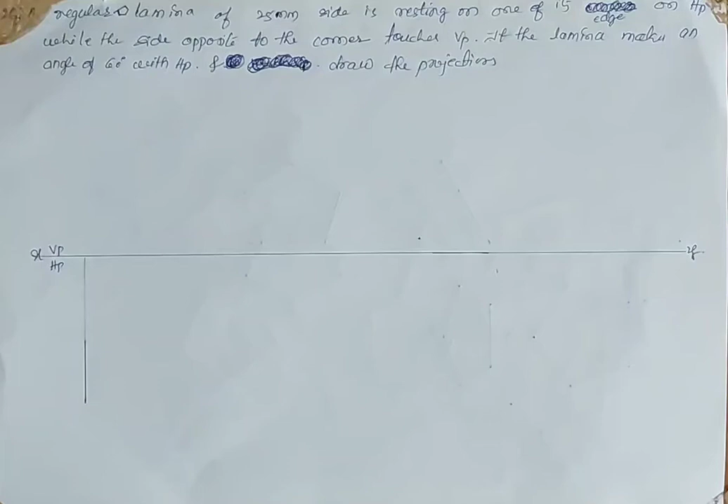Problem number 28. It is a regular pentagonal lamina of 25 mm side which is resting on one of its edges on HP, while the side opposite to the corner on which it touches VP. So this is the third question again. The pentagonal lamina is touching VP with a corner opposite to this side. It is the third position.

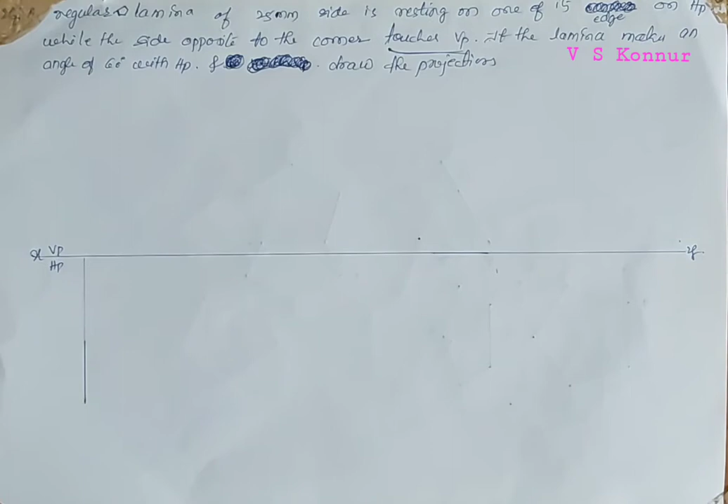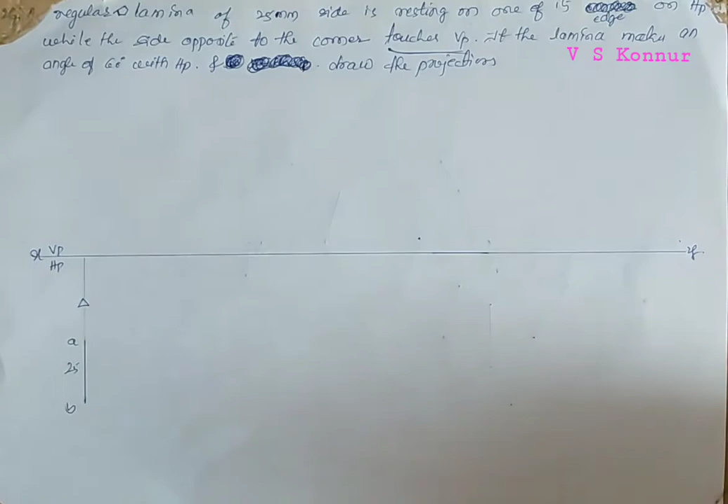The lamina makes an angle of 60 degrees with HP. So it is resting on HP, the HP angle is given, and we draw the projection. Now take 25 mm, so that gives points A and B. Now we'll take angles from these 2 points. We have to take the angles,

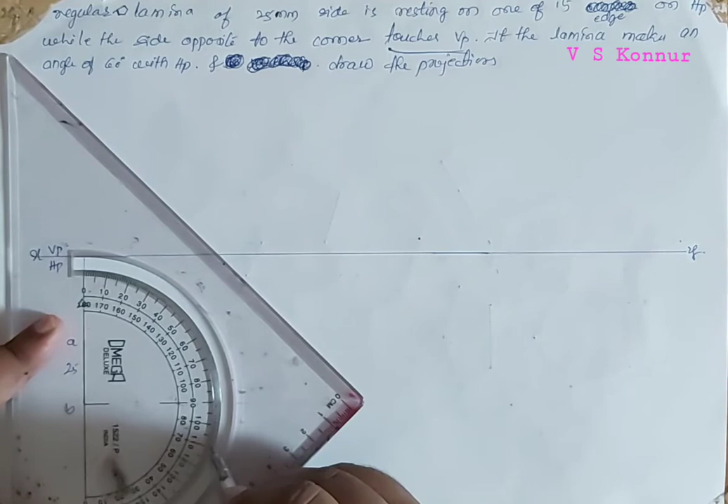that is 108 on either side, so 0, 90, 100, 110, so 108 we have to take. From this side we have to take 108. So don't make any error when you are taking it. 108 we got. Now we'll join these points with thin lines, not completely. As much as required, that much we will extend it.

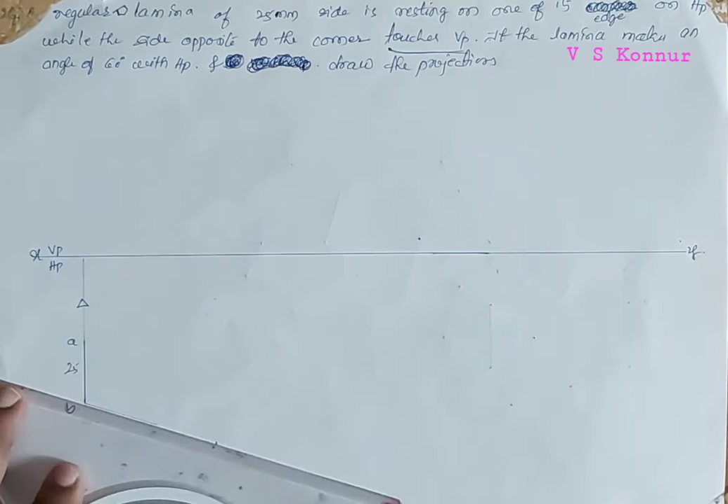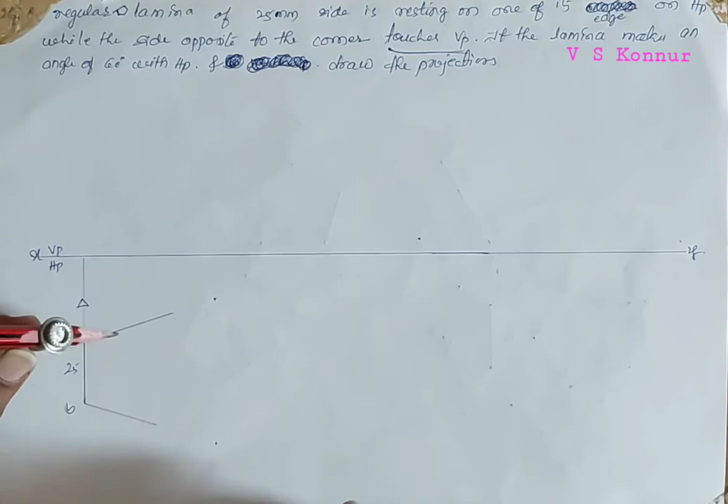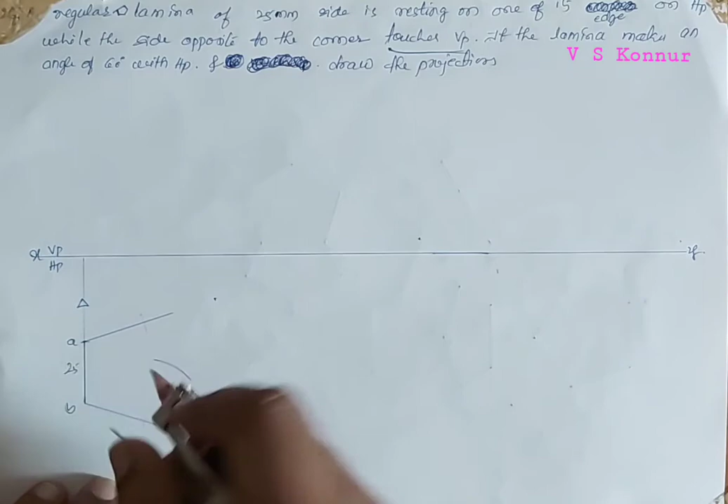Then we'll cut it by 25 mm distance. On either side we will cut. Next, from this point with the same length we'll cut this side, and from this side also. So we got 5 points of the pentagon: C, D, E. All the 5 points we got. Now we will make it dark and join the other points.

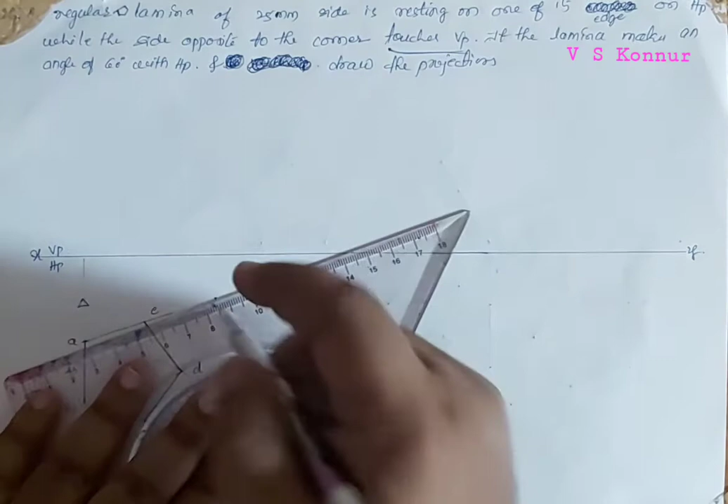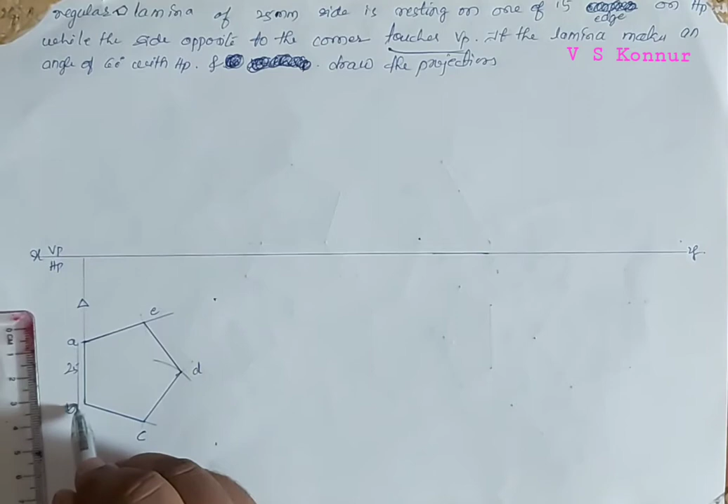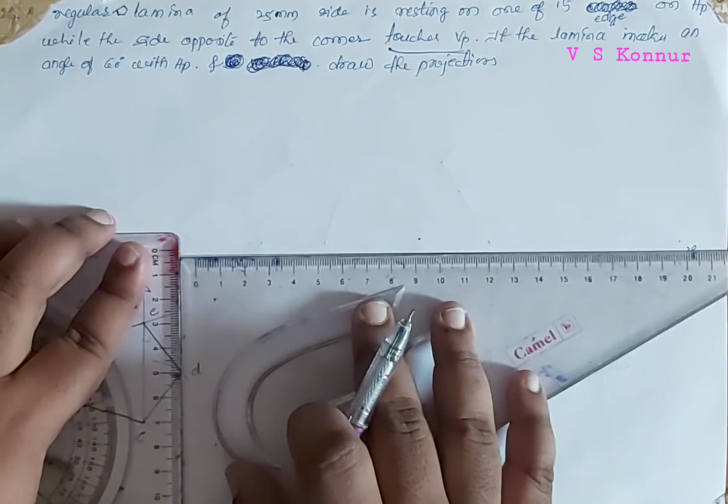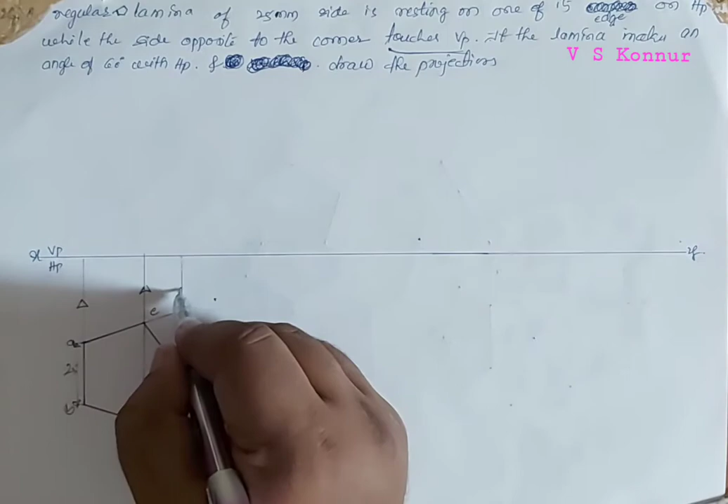Now one side is 25 mm, it is given in the problem. So 25 mm, resting on one of its edges. So first position. Now C and E pass at one point only, because of that we'll draw one more projector line here, and E should be drawn parallel to the XY line. Thin line, and then that point will give the lamina.

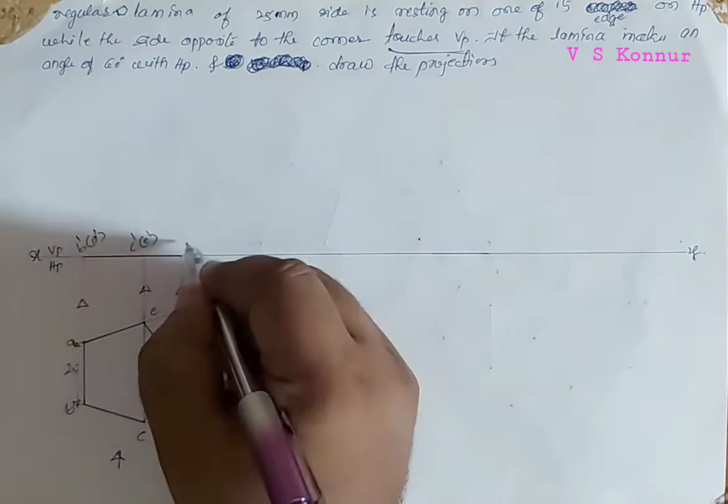When you are viewing from this side, B is visible, so we'll write it outside the bracket, and A is not visible, inside the bracket. Next, from this side C is visible, E is not visible, inside the bracket, and this is D dash. So resting on one of its edges with 25 mm side. First part is over. Next, the second part: it is resting on HP. Because it is resting on HP, you have to consider the HP angle first, and draw in VP. The HP angle is given as 60 degrees.

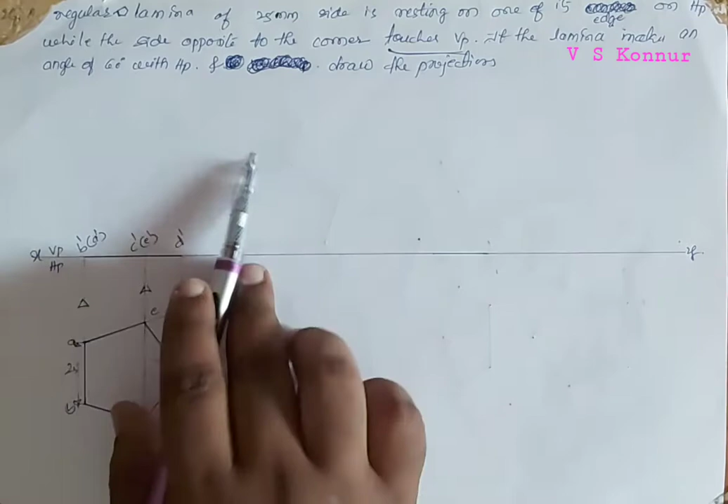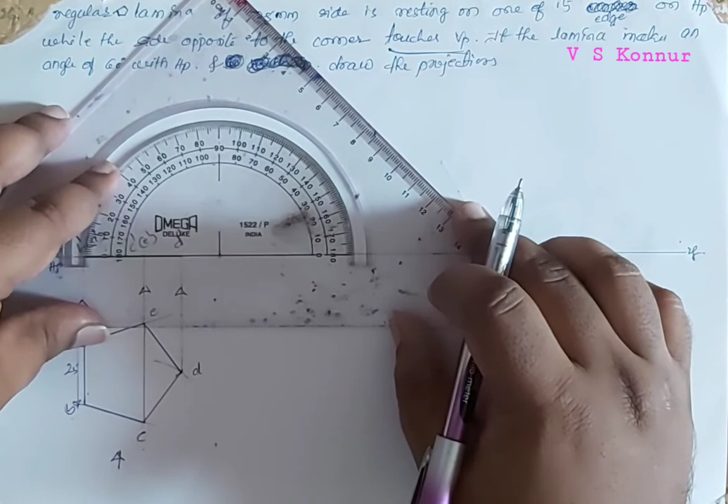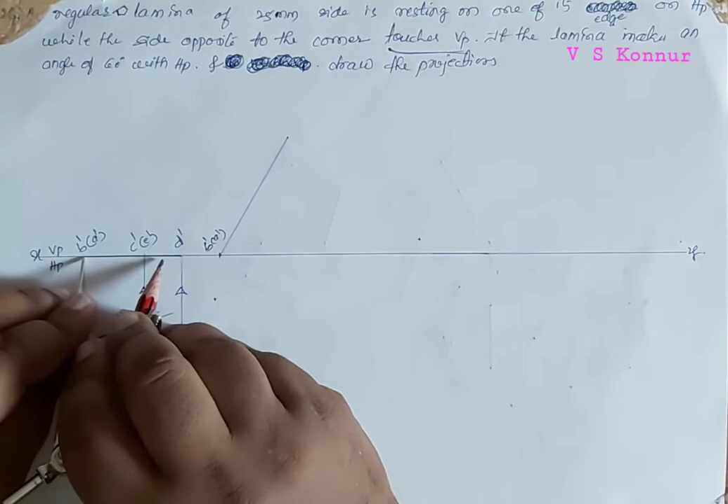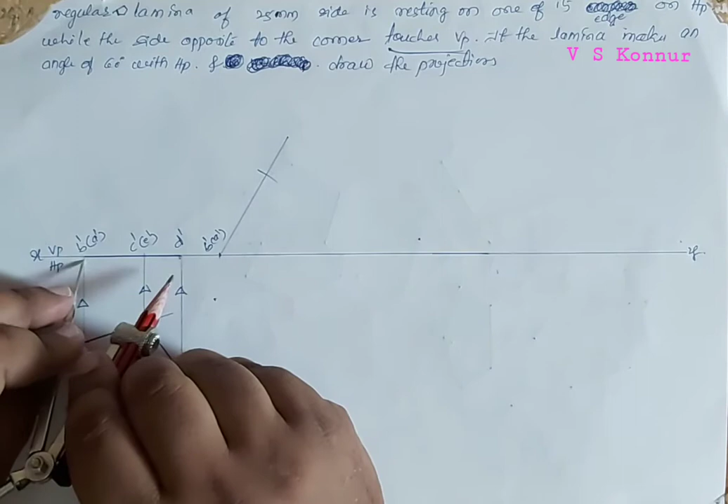Now we'll take 60 degrees by marking one point here. We'll take 60 degrees from this point. Now we'll join these 2 points with thin lines, and then this point is called B dash and A dash. And then we'll cut the distances. We'll cut the distance by keeping at B dash to get C dash, and then we'll take the distance of C dash point by keeping at B dash point.

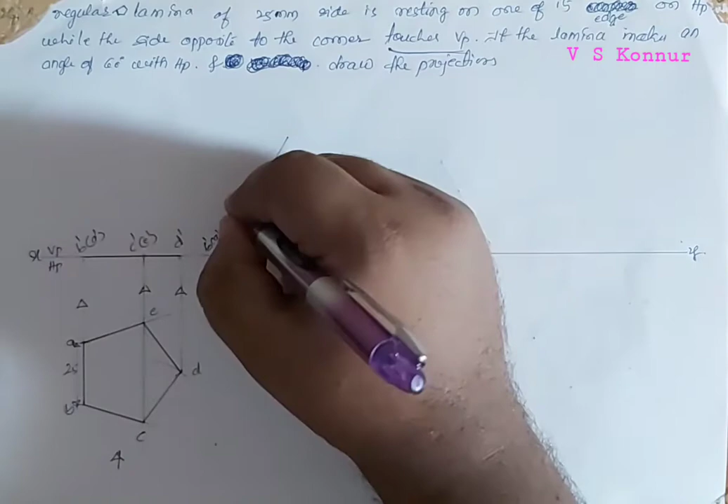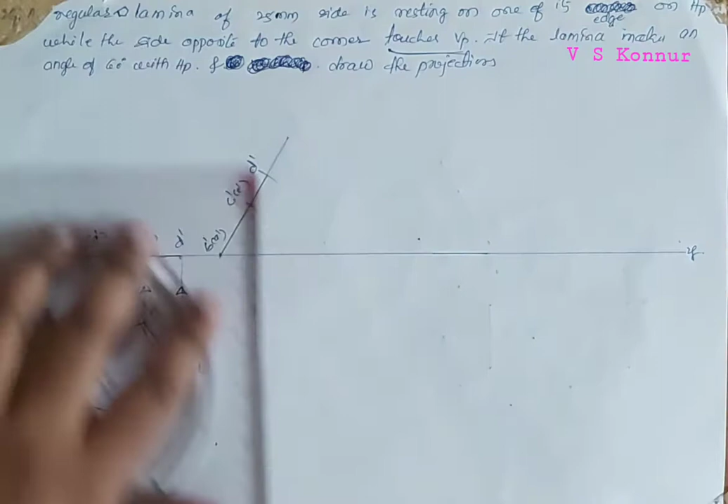One more cut I will make. So that point is called C dash E dash, and this point is D dash. Now mark only the lamina part, from this point to this point. Only that you have to make dark. Now draw the projectors from either side to get the top view of the second position. So we'll take this as reference.

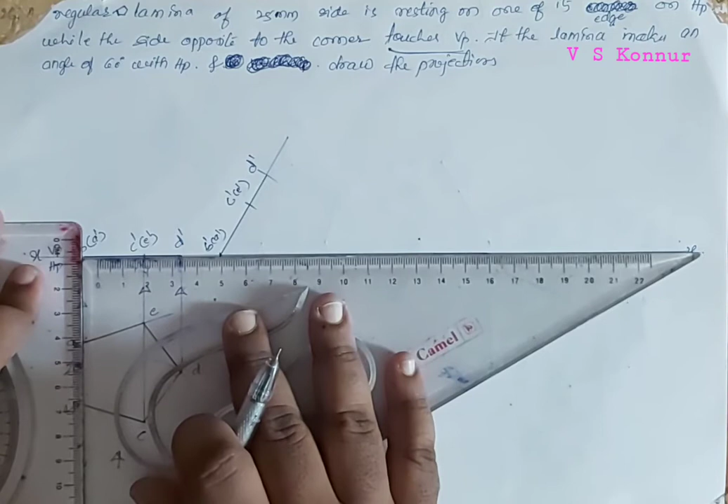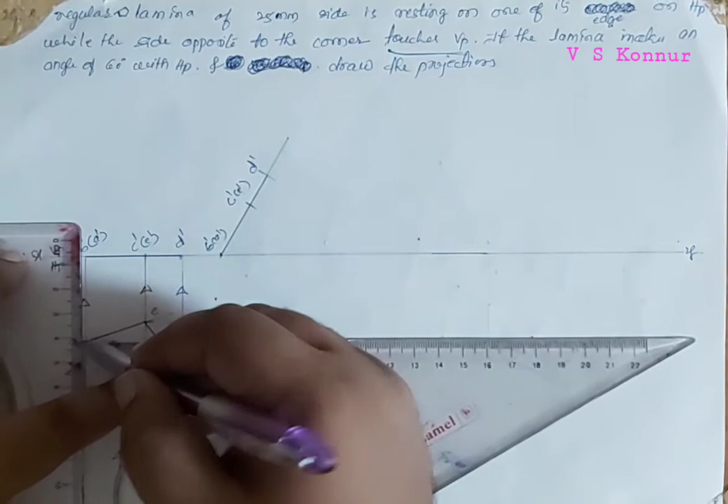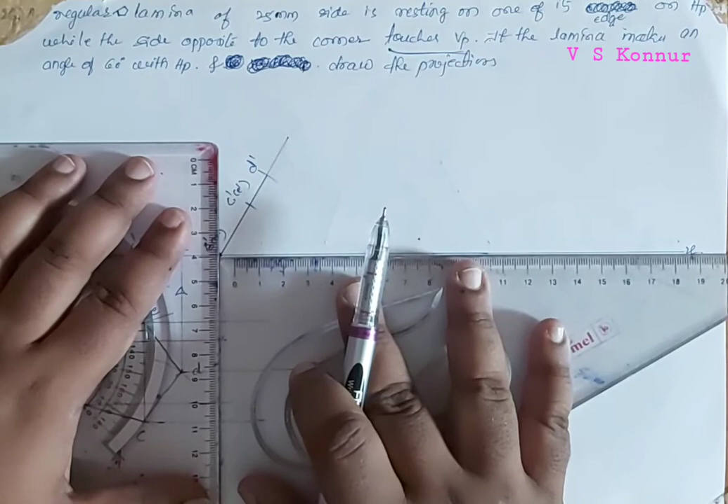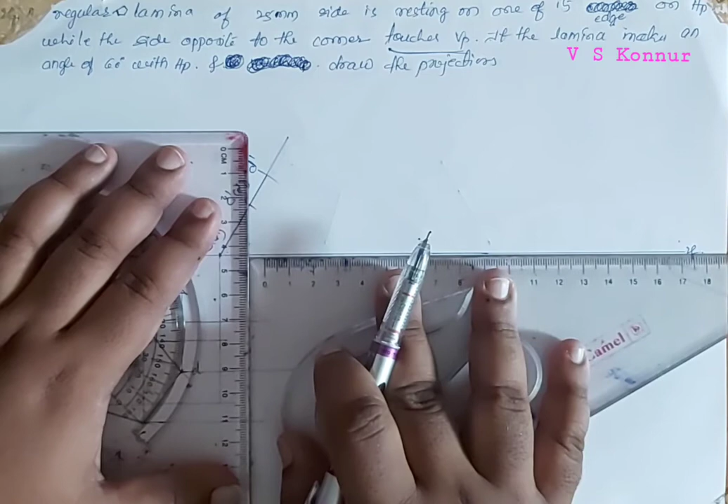Now from E point, till E point intersects, then from A point, D point, then from B point and also from C point. Then we'll go for B and A. Then we'll move on to C point. Then from D point.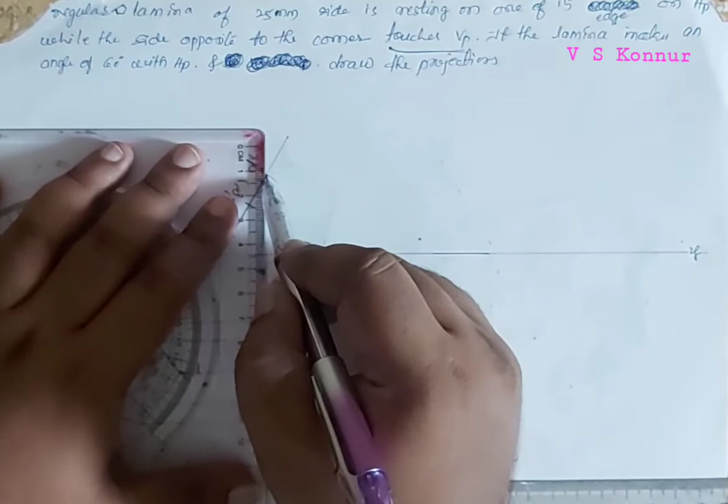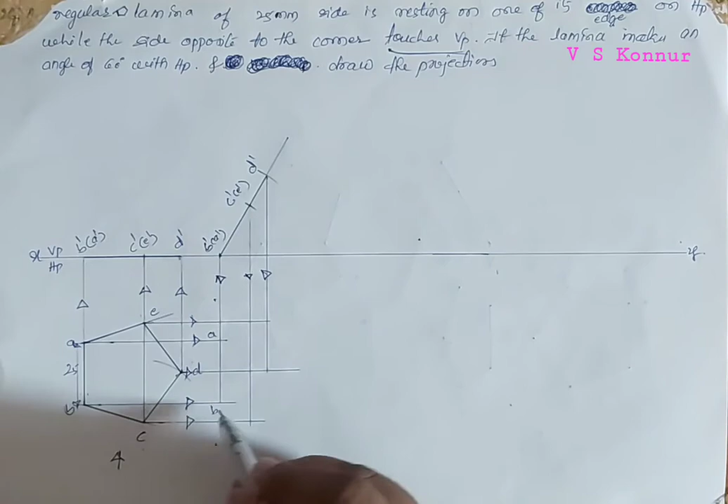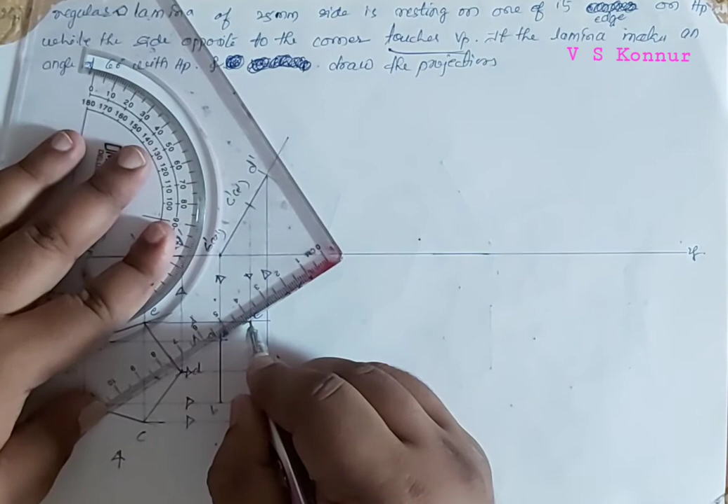Now give the arrow mark for all the projectors. Projector lines should be thin, only the lamina pentagon should be dark. Now we'll join all the points. So A to A it is A, B to B it is B, C to C, C is coming from here, C is this. So D to D, then E to E. Now we'll join all the points. Then A to E, then D to E, C to B,

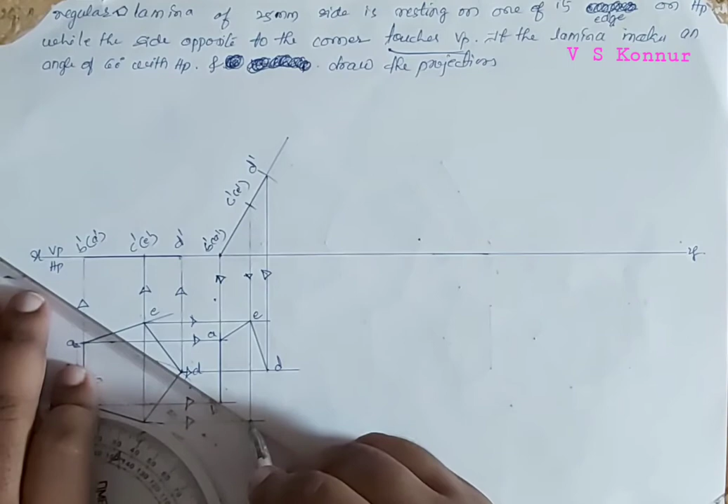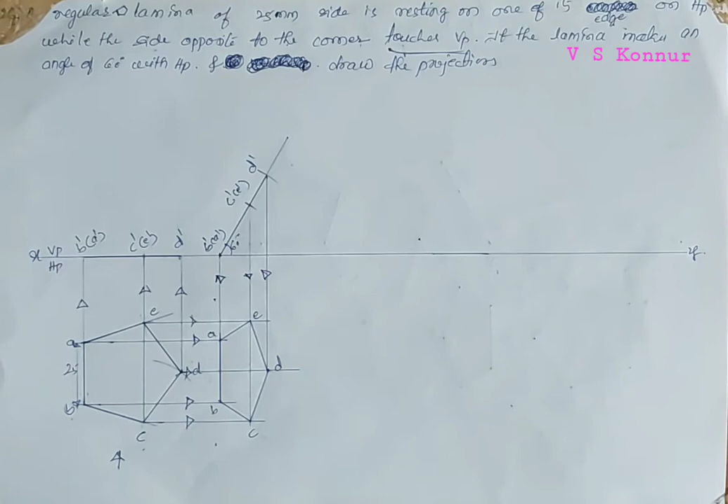then C to D. Now we got the second position top view, when it is inclined at an angle of 60 degrees. Now what have they given? The side opposite to the corner. This is the side which is opposite to the corner. This D point is the corner that touches VP. So the corner opposite to the side touches VP.

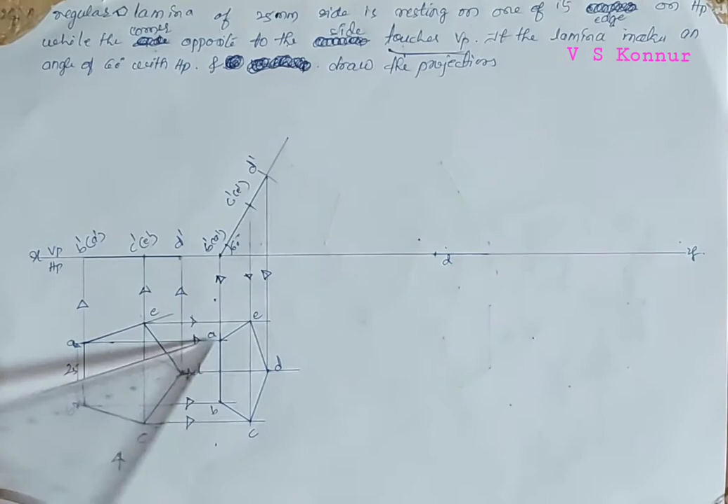Now this corner will be touching VP, as explained in the problem. So the corner D point I'll keep at this point. Now we'll take the perpendicular distance. We'll draw a 90 degree line from this point. So don't make any error when you are drawing 90 degrees from that point. So we'll take 90 degrees here and we'll draw.

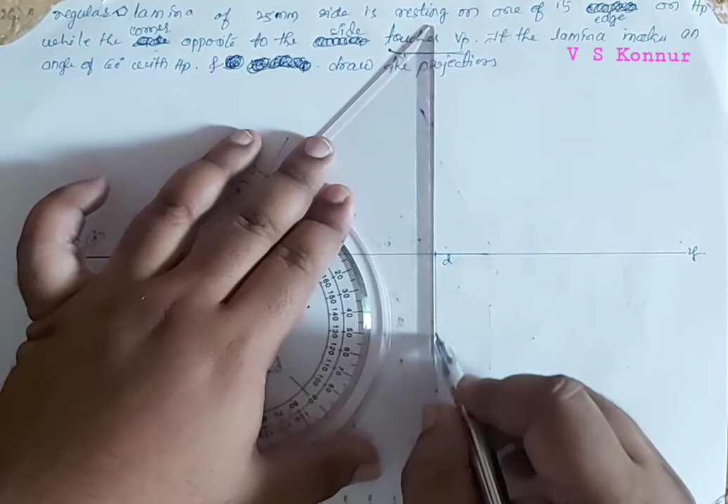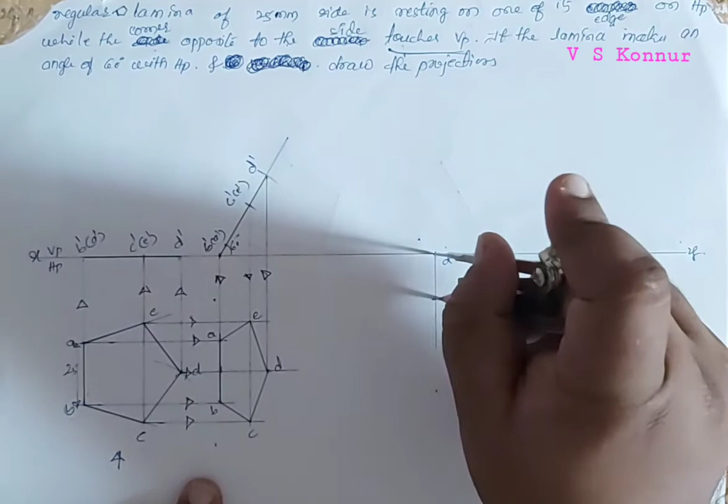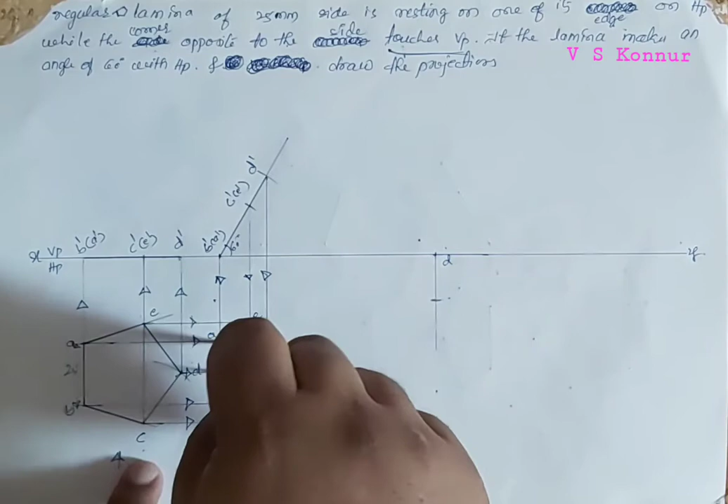Now we have D point and we'll cut it by this distance. From D point I have to cut this distance, the opposite edge distance. So this distance I will take and cut from D. Now take the distance from this point to A. On either side it is the same, so we will draw an arc from this point to A and from this point to B,

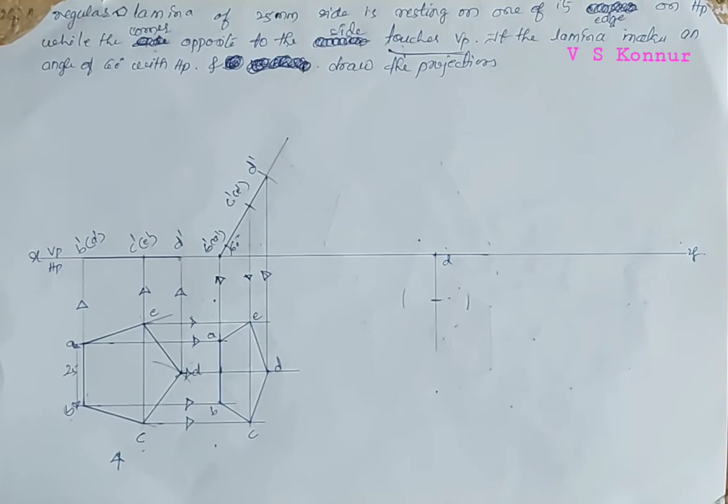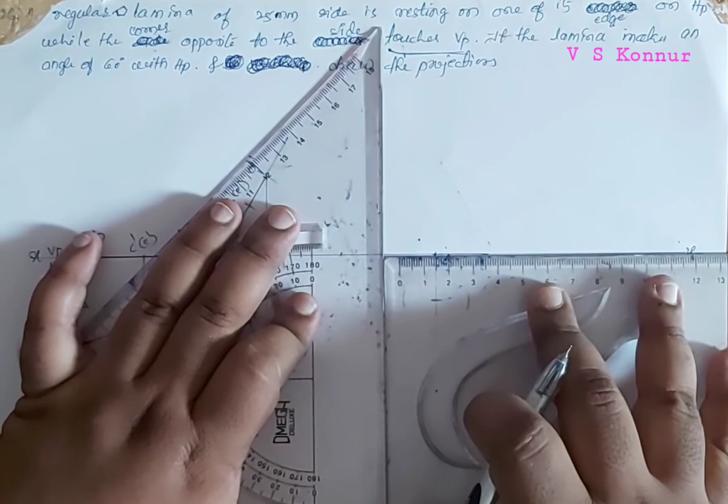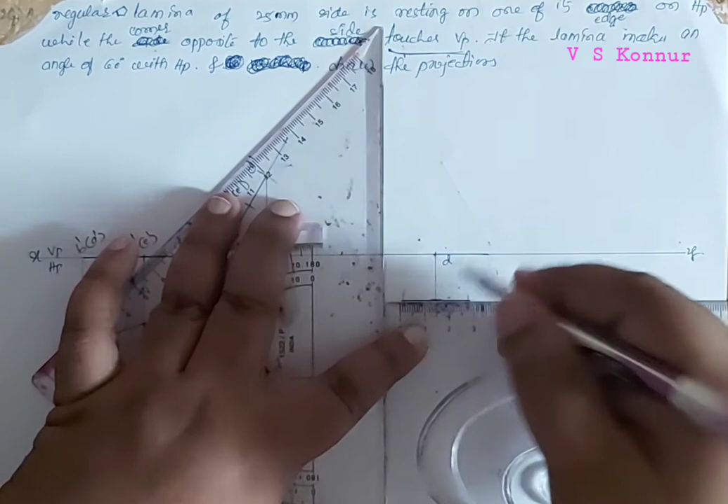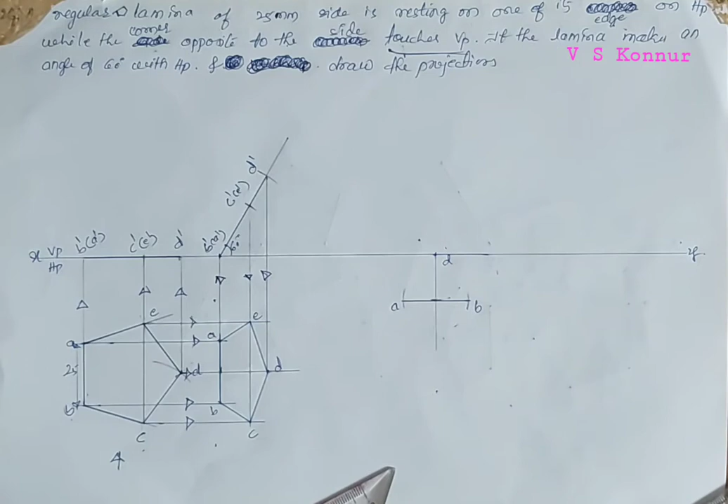and then we'll draw one perpendicular line or parallel line, you can take either. So this parallel line I will take. From that point I will draw one line for intersecting on either side, or you can take 90 degrees on either side. So here we will get A point and B point. Now by knowing 2 points you can construct anything. So we will take the distances by knowing A and B.

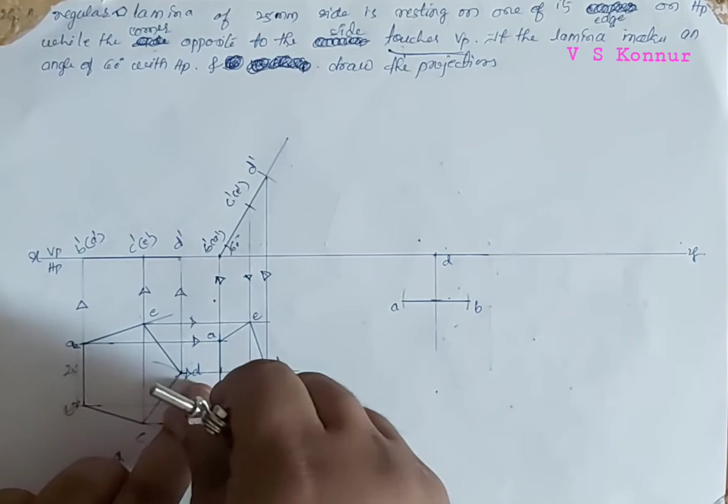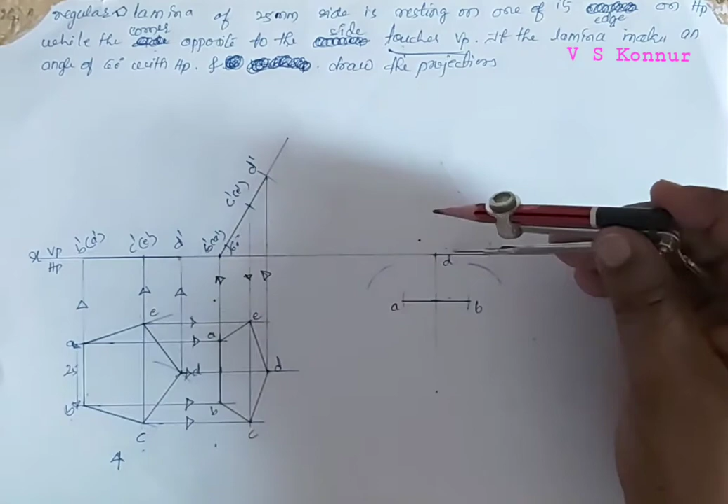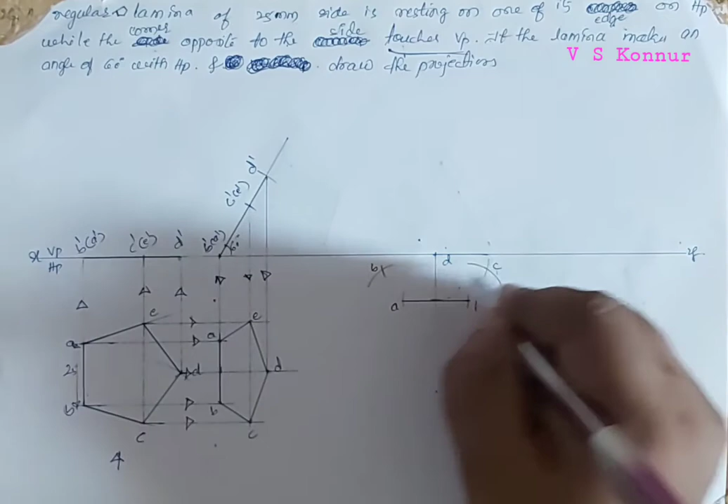So B to C distance I will take. So B to C I will draw, and then A to this arc, and then we'll take the opposite, or you can take from D to E on either side. So we'll get C point, D point, and E point. So join all these points.

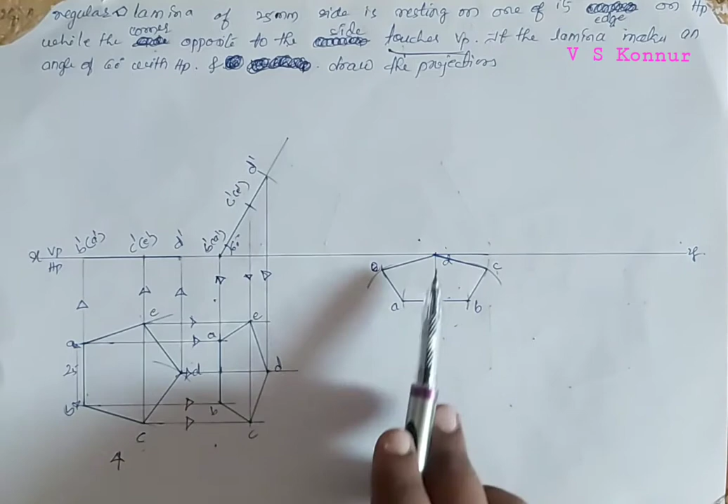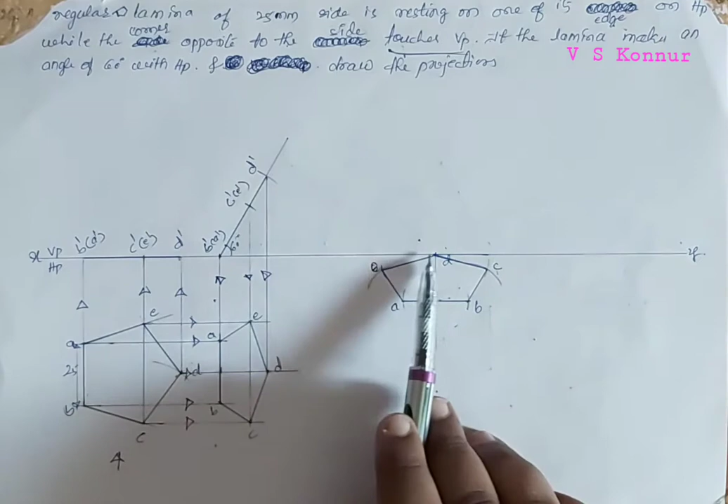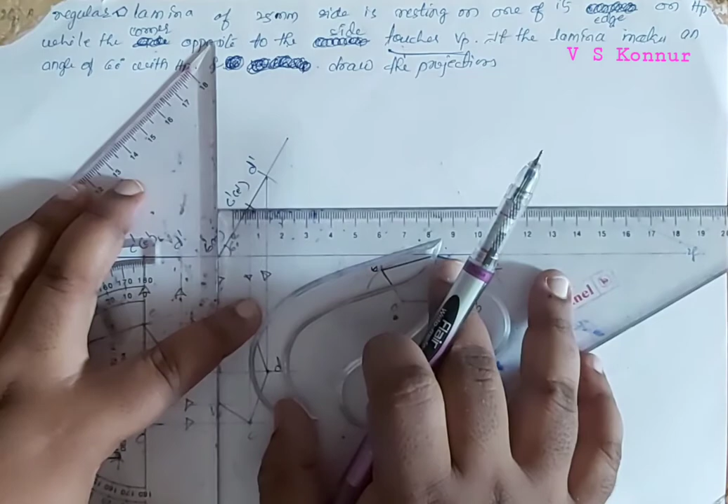So now the same pentagon is transferred here, with the opposite corner touching VP. Now I changed the problem here. This was side opposite to the corner. Now it is the corner opposite to the side which is touching VP. So this point is touching VP. Now we will draw the projectors from either side. I will draw from E point.

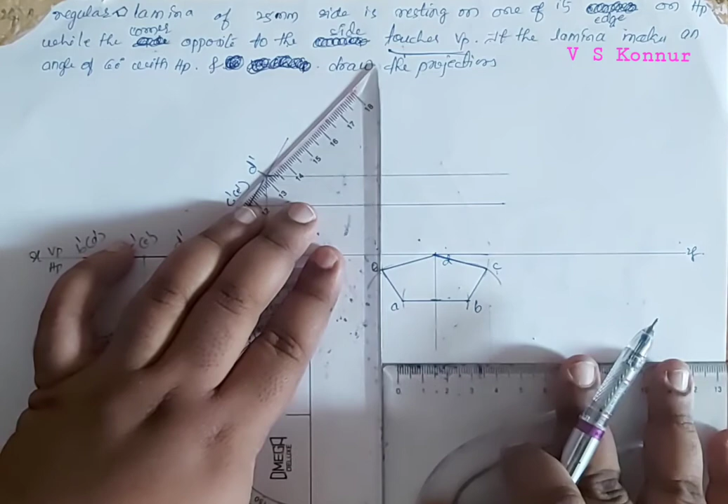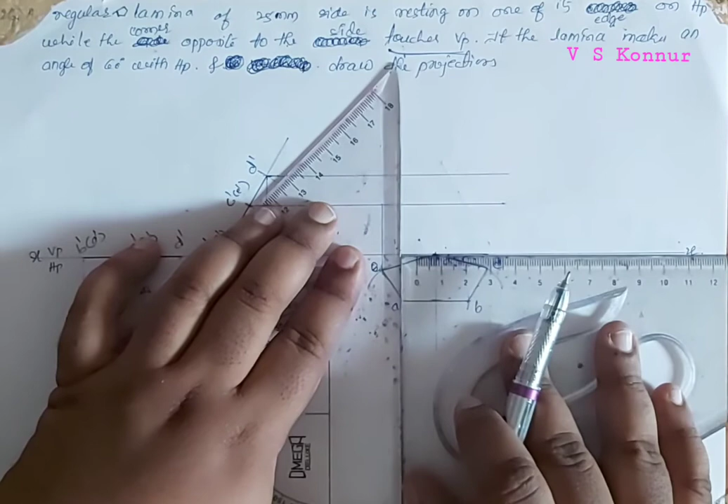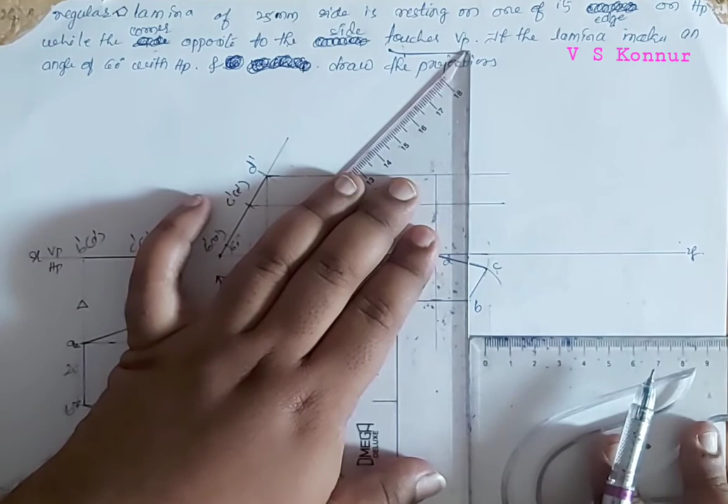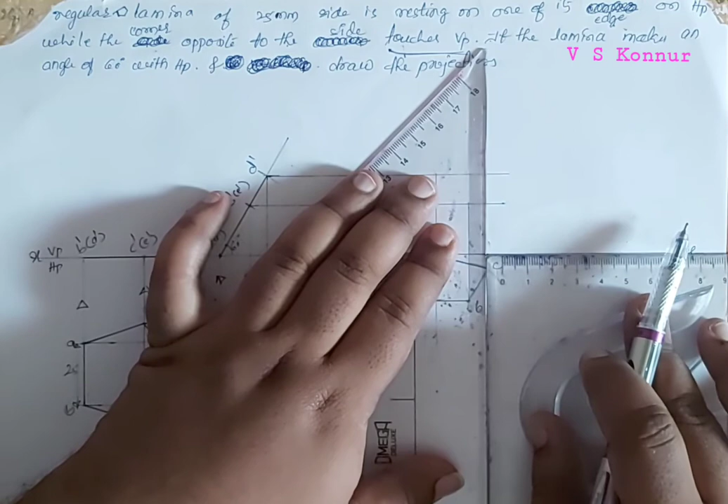Till E intersects, then from A point, then from D point, then B point, so now we got all the points. We'll give the arrow mark for all the projectors.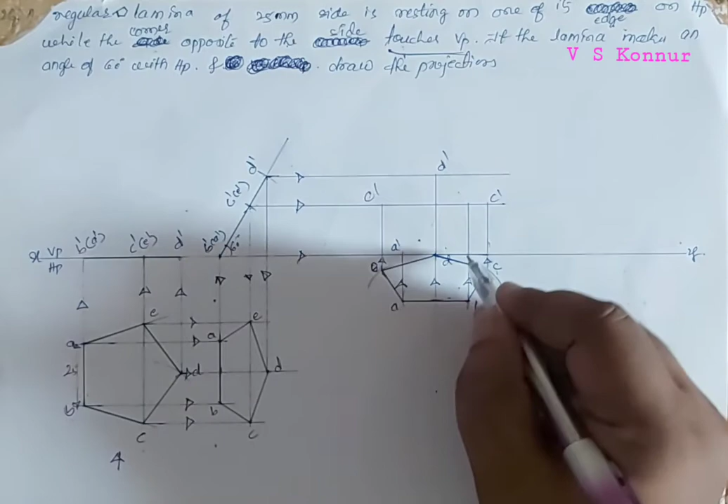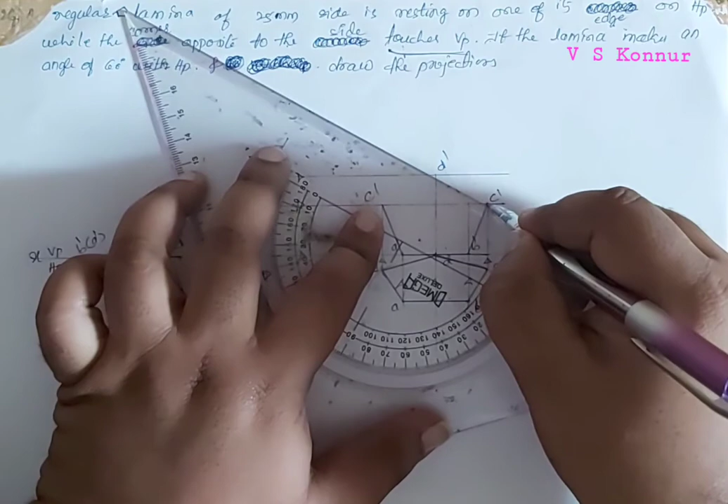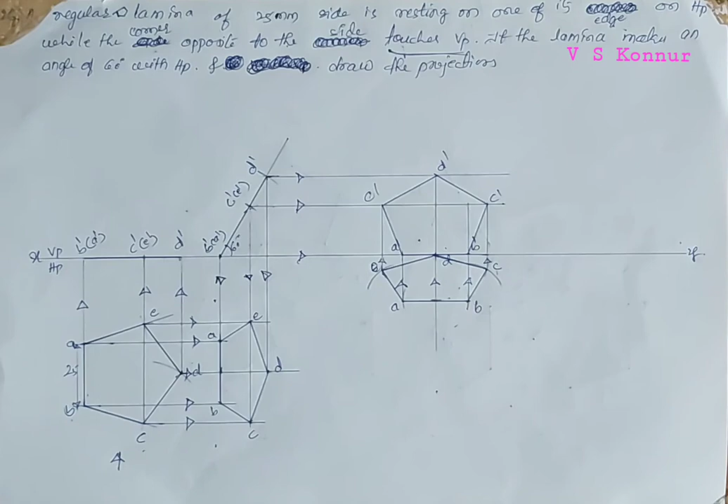So D both are intersecting, so we'll give D dash, C dash, E dash, A and A intersecting here, A dash, B and B dash. Now we'll join all these points. Now this is how to solve when a corner touches VP. This problem I have changed. It was side opposite to the corner. Now I have changed it to corner opposite to the side touches VP. This is the corner that touches VP.